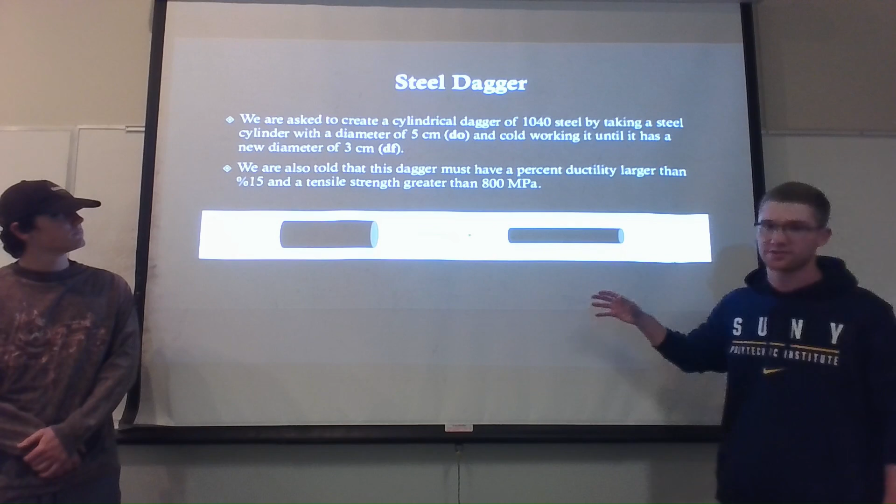We were also told that this dagger needs to have a percent ductility larger than 15% and a tensile strength larger than 800 megapascals. So we could start by taking the cross-sectional area and finding the percent cold work. We do this by taking the original area, subtracting it by the final area that we want, this being the cross-sectional area, and then dividing it by that original area and multiplying it times 100 to get our percent.

Since we're working with a cylinder, obviously it has a round end, so we need to take the area of a circle on that end. So what I do here is I take the areas and substitute in the circular areas. Then we can take away the pi and the half out of all these because they'll just all cancel. So we'll end up with this equation here that takes the diameters and squares them and does the same thing as the normal area equation does.

So when we do this, we take our original diameter of 5 centimeters, subtract it times our final diameter of 3 centimeters, and divide that whole thing by the 5 centimeters and multiply it times 100 to get our percent. Of course, these are all squared as well, I forgot to mention that. And that gave us a 64% cold work.

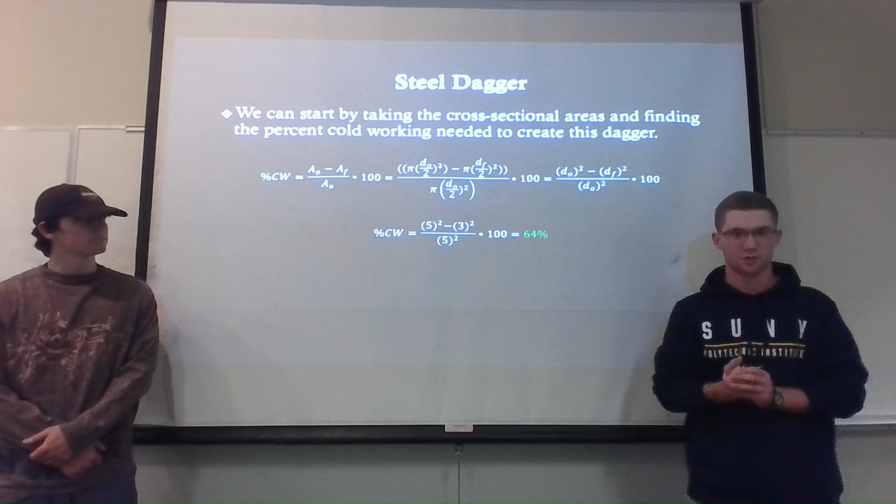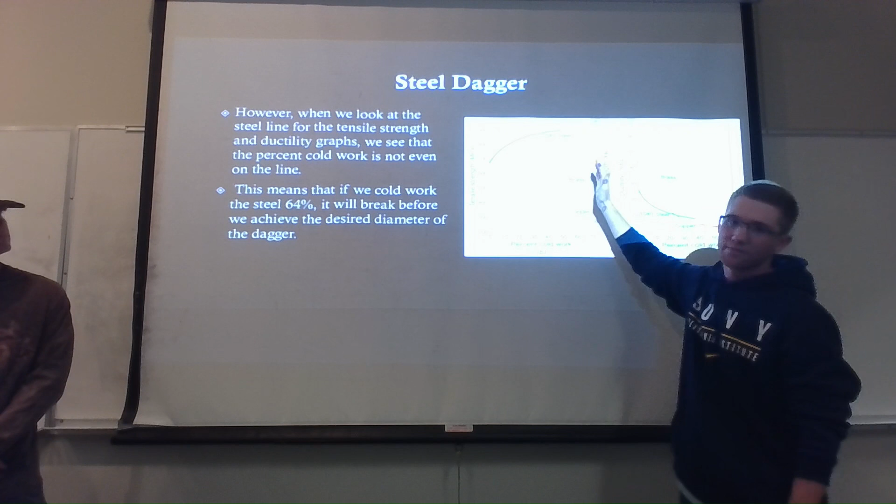So when we compare it to our graph for steel, we see that this line here represents the cold work, which it is, you just can't see it, but it's there. So the line for our cold work at 64% on both of these doesn't match up with the steel line at all, it is completely off. So in this situation, the steel is broken. We've stretched it or cold worked it far enough to where it has just snapped. It's broken. It's done.

So in that case, we're going to need to anneal it at some point. Since we can't take it all the way from 5 centimeters to 3 centimeters without it breaking, we're going to need to stop somewhere between there to anneal the metal, to let it heal, and then we could draw it out the rest of the way to get our desired diameter and our desired tensile strength and ductility.

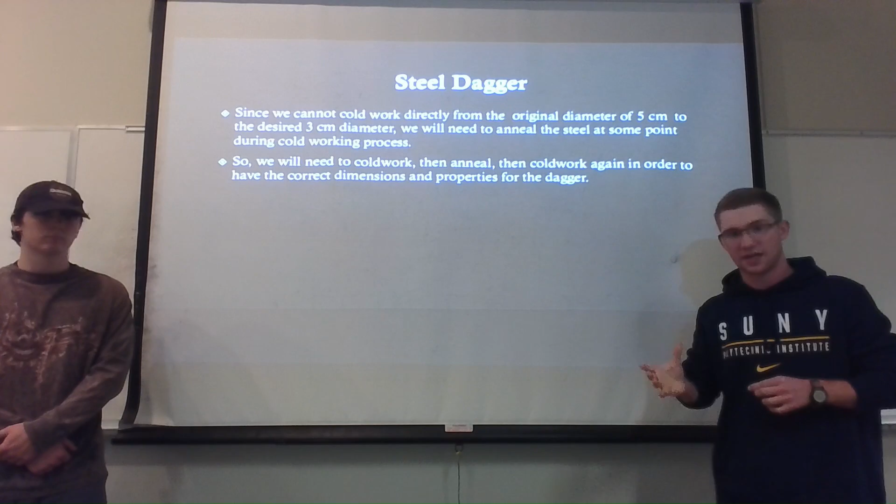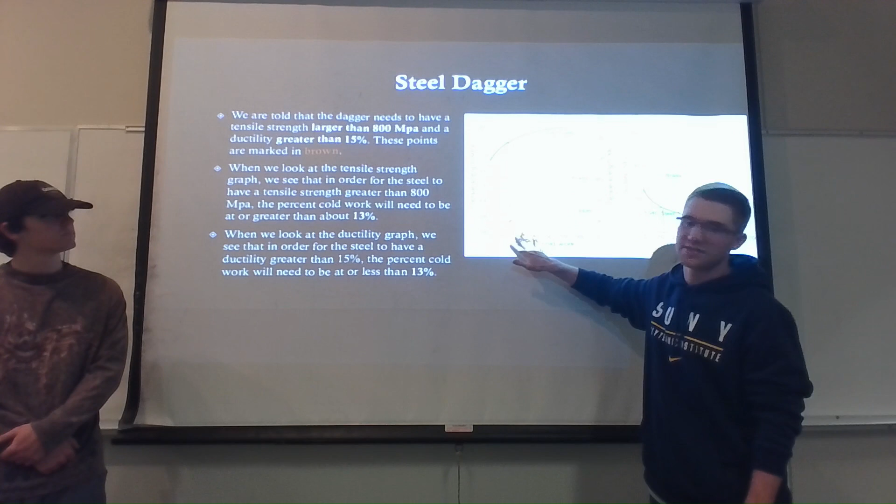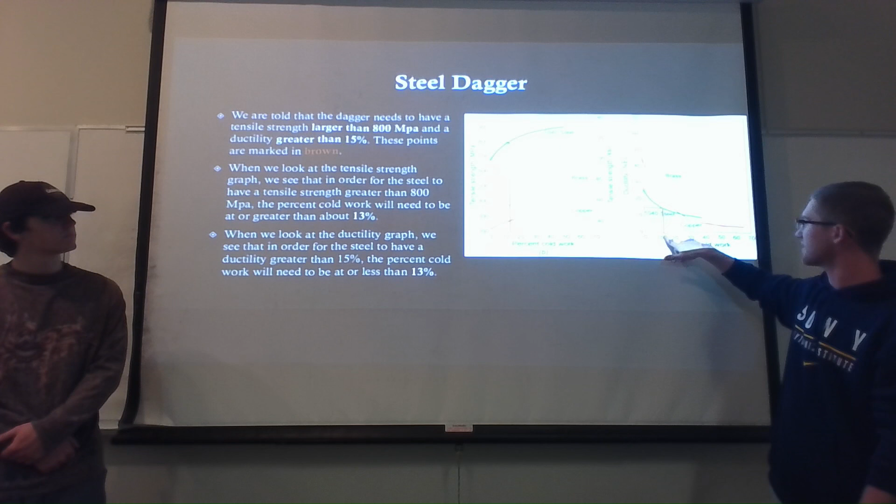So if we look at our graphs, we need a tensile strength greater than 800 megapascals. So again, hard to see, sorry. What we see here is that the 800 megapascal mark is about the 13% cold work on this graph. And then on the percent ductility, we need it greater than 15%. So when we line it up again, we see that this is also about 13% cold work.

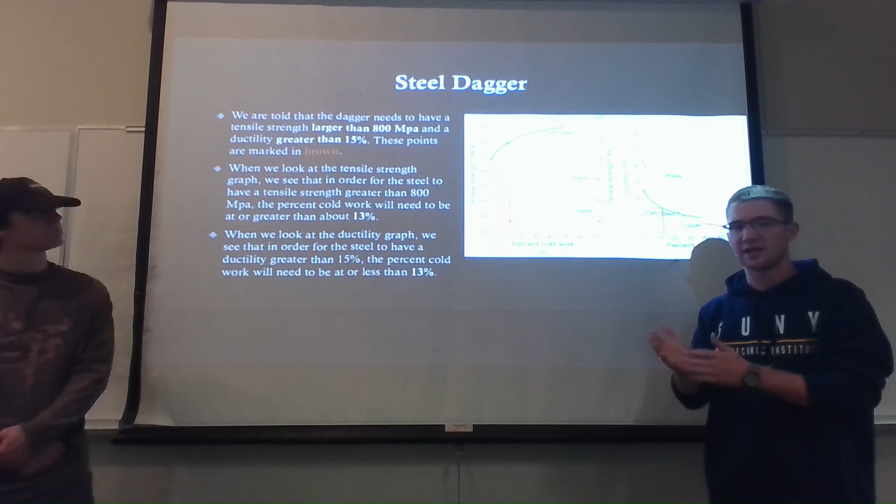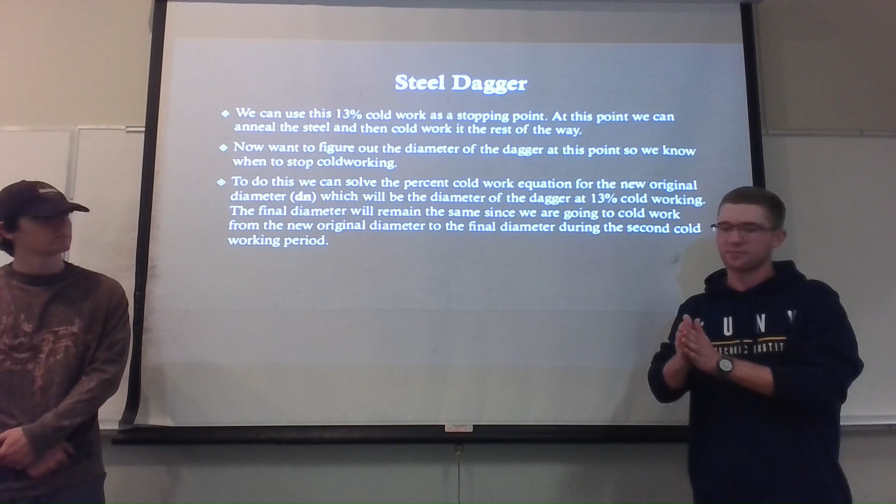So we can use this 13% as our new cold working value, and then we can solve for this new diameter that we will cold work to. So we'll cold work to this new diameter, we'll anneal it, and then we can cold work it the rest of the way to get our final diameter. So we will go from our initial diameter of 5 centimeters, we'll take it to this new diameter, we'll cold work it that whole way, we'll anneal it, and then we'll cold work it the rest of the way to the 3 centimeter mark.

So what I do is I take that last equation we used and I take out the initial diameter, and I substitute in this new variable, which would be this new diameter dn. So we want to find this dn, so I rearrange the equation into this one here, which will solve for the dn with respect to the percent cold work and the final diameter.

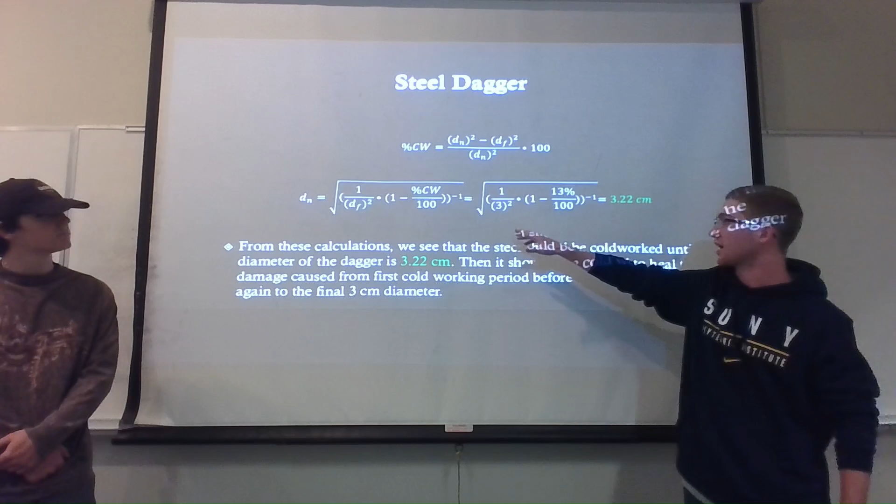So when I put in our numbers, we have 3 centimeters, and then we have the 13%, which we found by looking at the graphs. And we find that this new diameter is 3.22 centimeters. So again, what we will do is we will go from the 5 centimeter diameter, we're going to cold work it down to this 3.22 centimeter diameter. And then from there, we'll anneal it, and then we can finally go from this 3.22 centimeters down to our 3 centimeter diameter. And now I will hand it off to Ned.

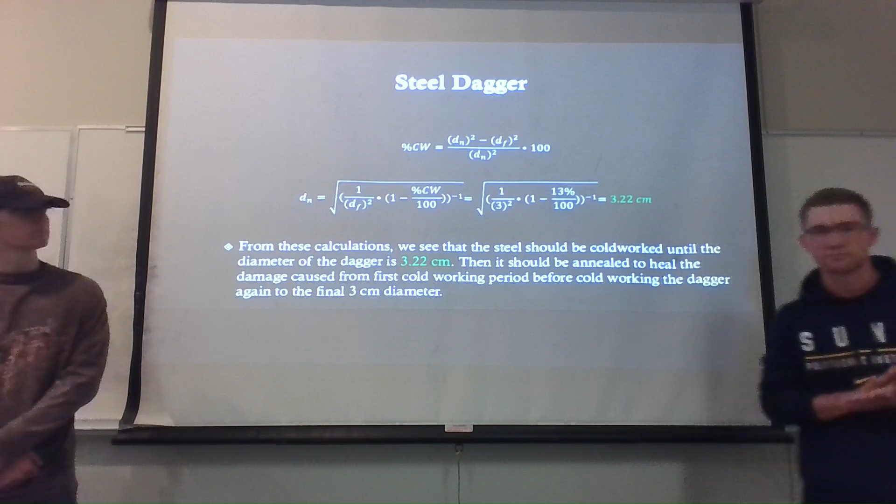So finding that 3.22 is going from 5 to 3.22. This is our intermittent stage, where the material can recrystallize and form new grains. Once you form these new grains, the graph we saw before just refreshes and you can start back off from how it was initially. So you're going from that 3.22, and then it's saying 13% cold work was done, giving us 800 megapascals and a value of 15% ductility.

So if we apply that same process to aluminum, we're not actually finding the values for 800, since aluminum is much weaker than steel and won't get to 800. But if we take this same process with a 5 centimeter diameter rod of aluminum, there's 3 stages to that same work that we just did.

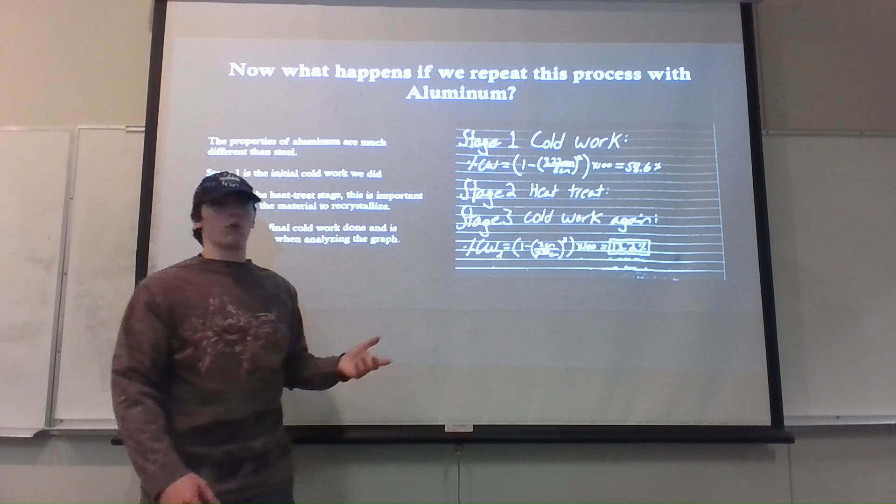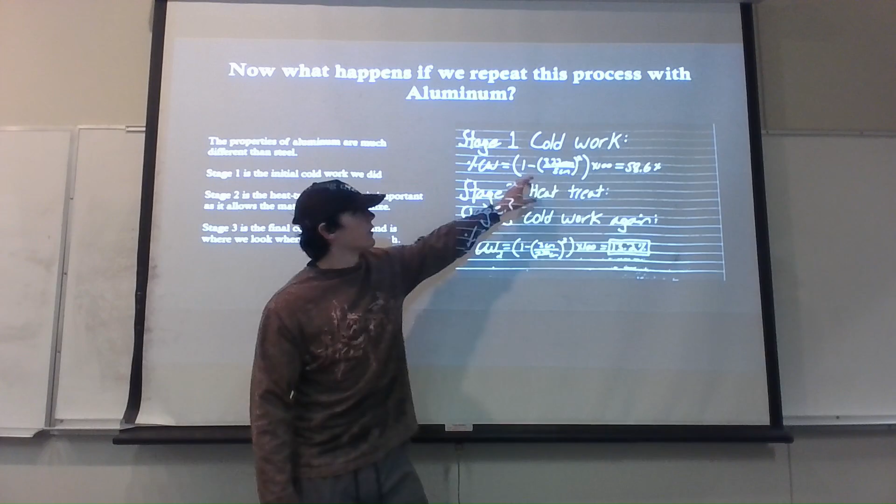Stage 1 is our initial cold work, getting it from 5 to this 3.22 value. If you plug in the formulas he was just using before and multiply by 100, you can see this is our 5, this is the 3.22, this is the intermittent, and it's 58.6% cold work done to get it from 5 to 3.22, which is where we want it.

Once it's here, we need to anneal it and let it heal. If we just tried to pull out the whole 64%, it would break, same as with steel. So then you go to stage 2 where you're annealing it, which allows it to get new grains, and then you could start again for stage 3 where you're cold working using the same process as before.

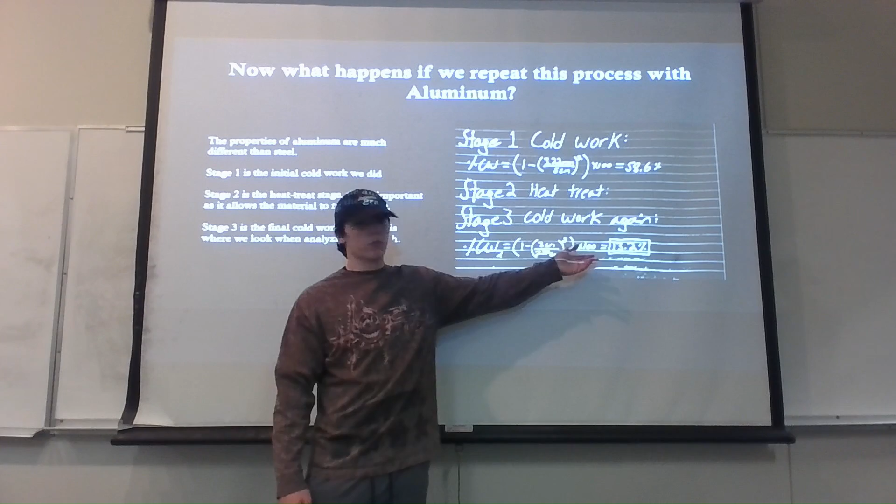If you're going from 3.22 to 3, you're going to get the same value we found for 13.2. So this same process is just taking what we did with steel, taking it from 5, bringing it to 3.22, and then bringing it back down to our desired value of 3.

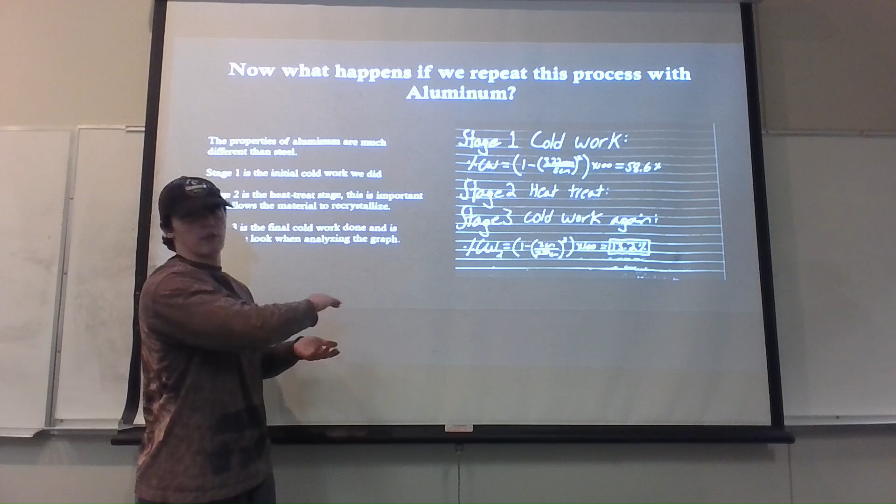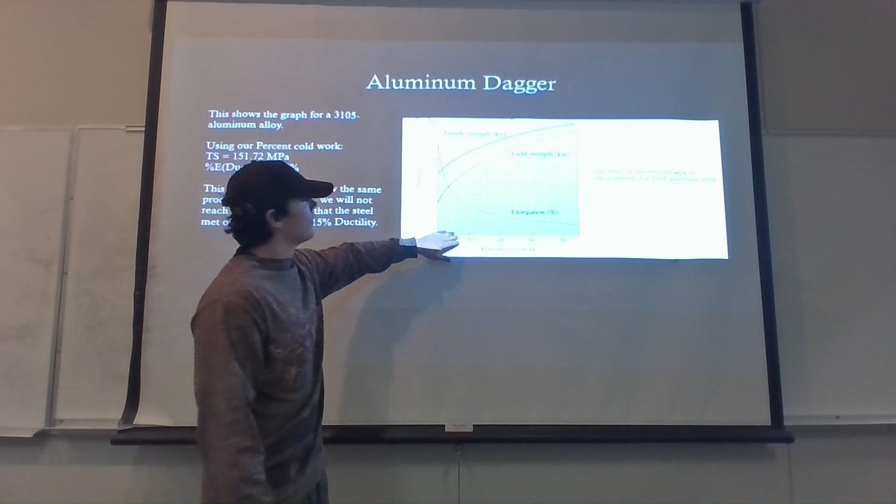Now, if we take this 13% value we found, this is the graph for aluminum, so it's different than steel and the values are going to be different. This is in KSI, so we have to convert that to megapascals. If we take our 13% cold work and follow it up along the graph, we'll find that for aluminum we'll only get around 8% ductility, compared to the 15% we had for steel.

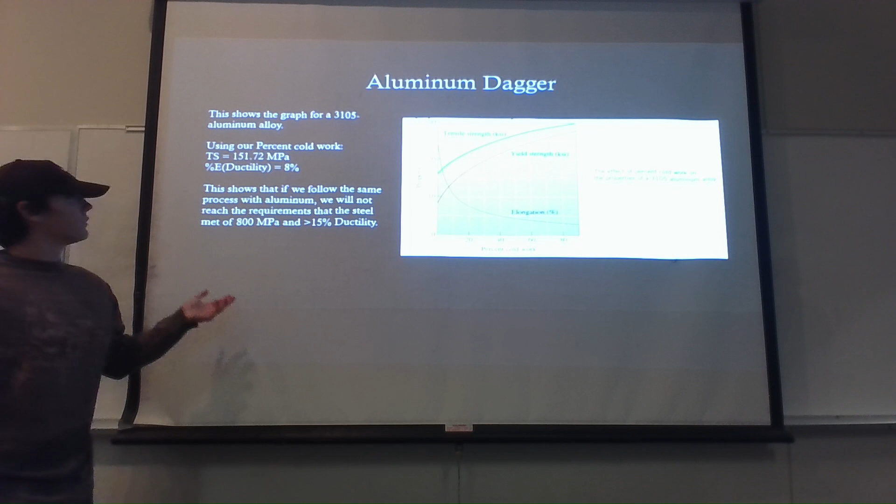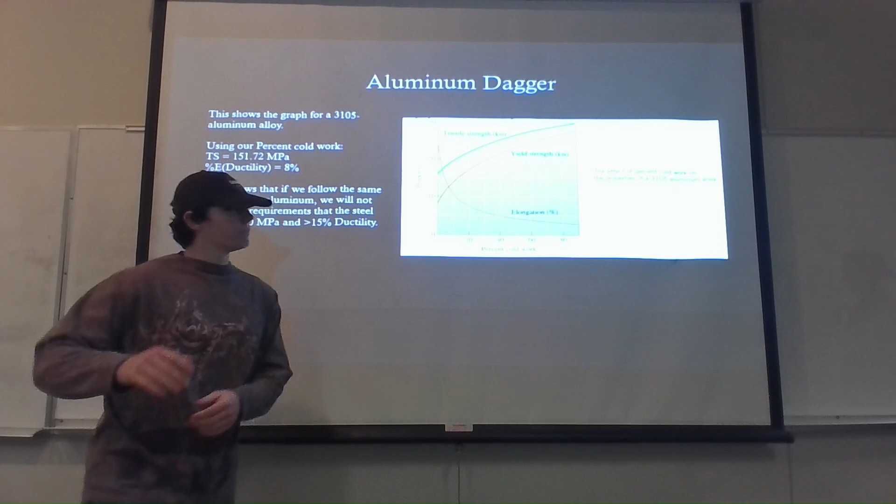And then if we take that 13 and keep following it up to the tensile strength, we'll only get around 151 megapascals. This is a lot less than the 800 we needed for the steel, and the 8% ductility is also a lot less than what we needed from the steel. So this just shows that aluminum has a lot different properties than steel. If you try to do the same process, your dagger is going to be a lot weaker and won't do as well as the steel would.

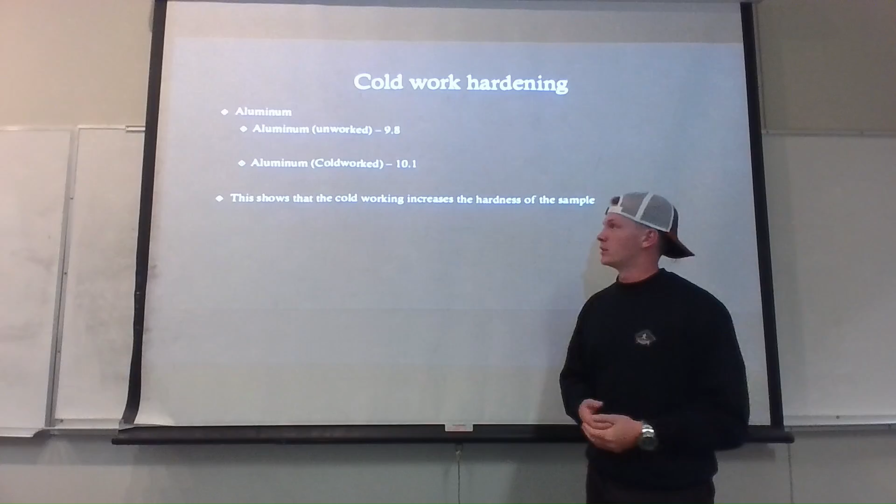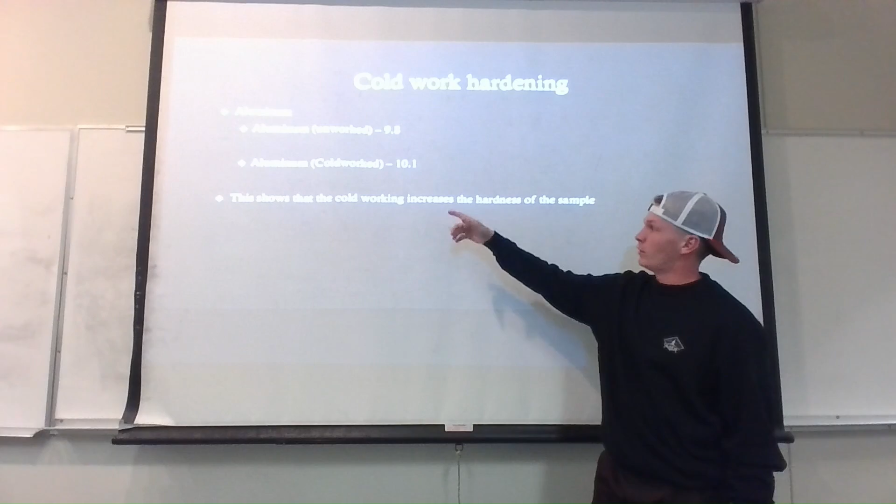So what we're looking at here is how the different samples changed when they were cold worked. Using our experiment from lab, the unworked section of the aluminum had a hardness of 9.8. When we tested the cold worked section, it was a hardness of 10.1, showing that cold working does increase the hardness.

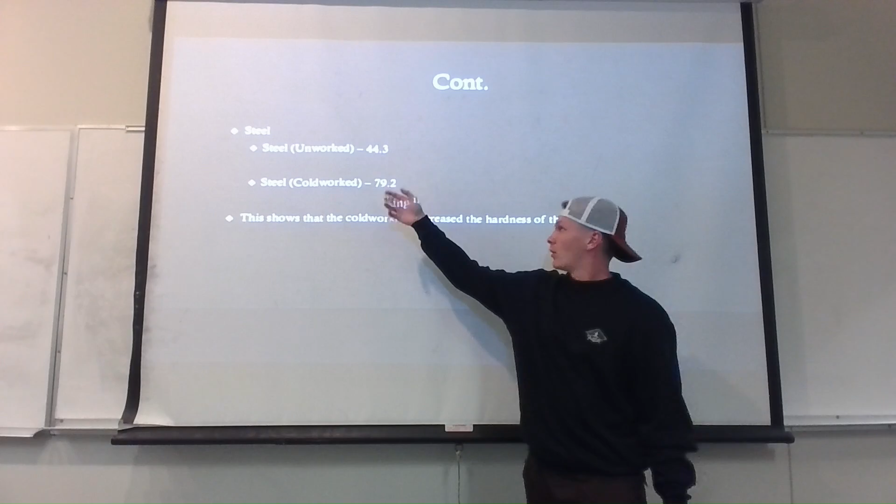Same thing with steel: unworked, it was at 44.3 hardness, and when it's cold worked, it was 79.2. Again, this is just showing that it's going to be harder in the section where it's cold worked.

So just comparing the two real quick, the steel showed a much larger change in hardness depending on where it was worked. The difference in hardness was, instead of roughly 1 with the aluminum, it was like 30 something. That's just showing that cold working makes steel a lot harder than when you cold work aluminum.

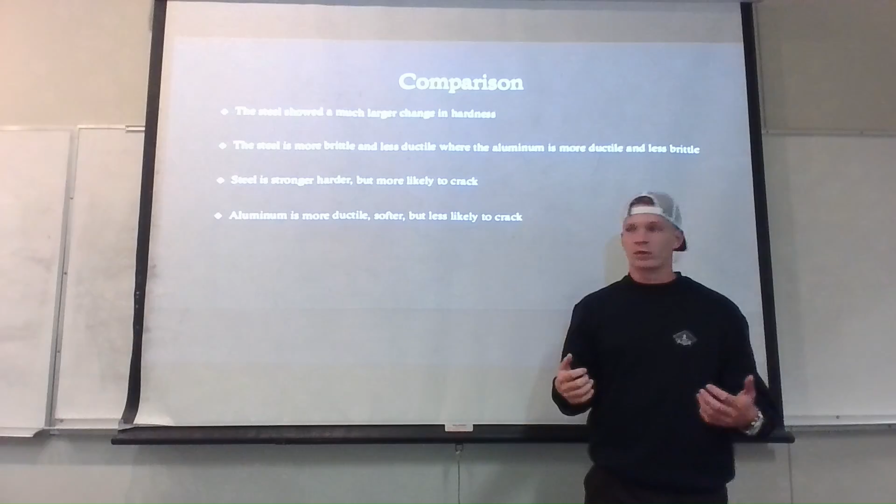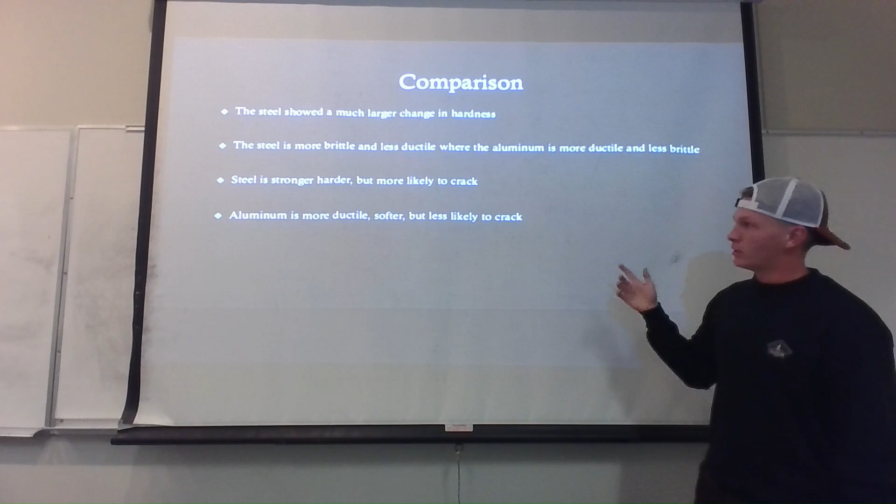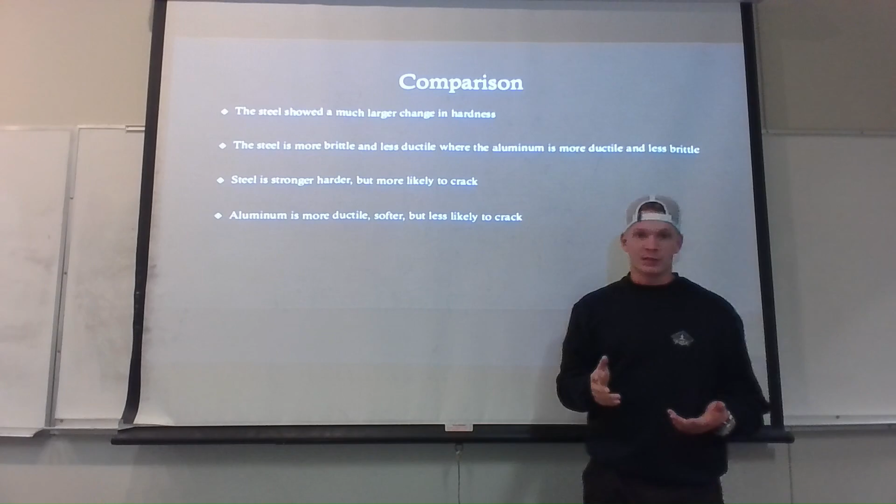Because of this, steel is going to be more brittle and less ductile, where the aluminum is more ductile and less brittle. So if you were to make a dagger with these materials, steel is going to be stronger and harder, but more likely to crack. Aluminum is going to be ductile and softer, but less likely to crack, so it'll be a bit more flexible and less likely to break when you're using it.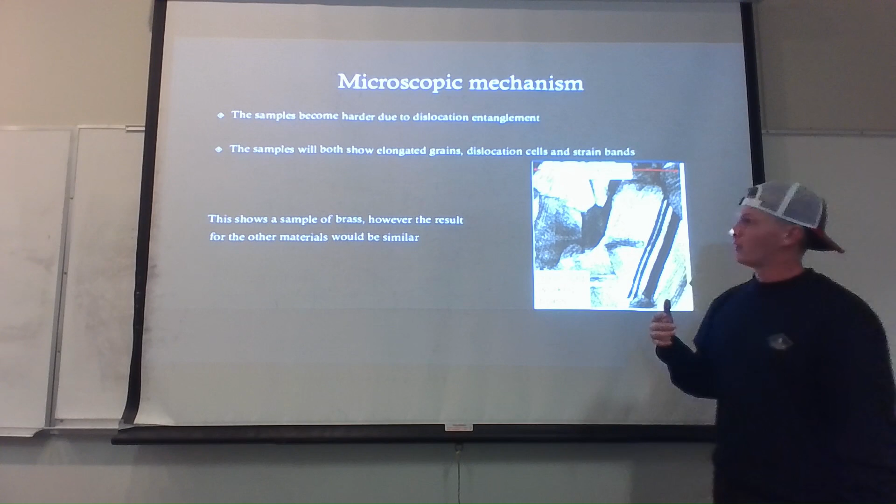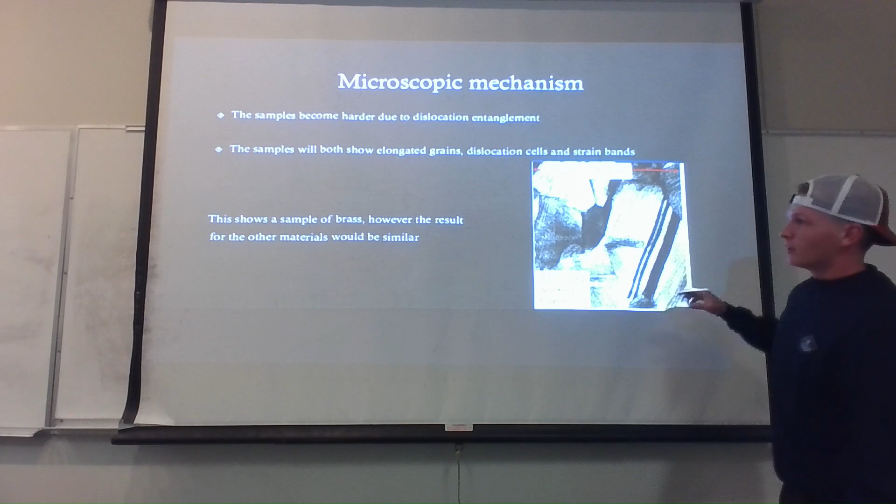The samples will both show elongated grains, dislocation cells, and strain bands like these here. So that's just showing that while this isn't the samples we used, that's what's happening when you cold work a material, and that's going to be what's making them stronger.